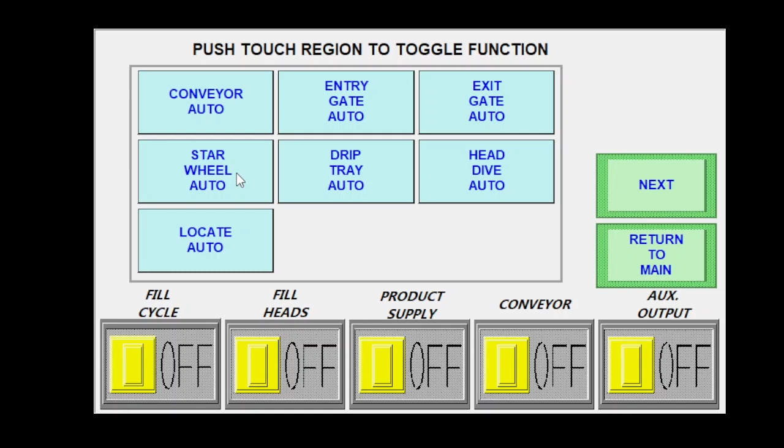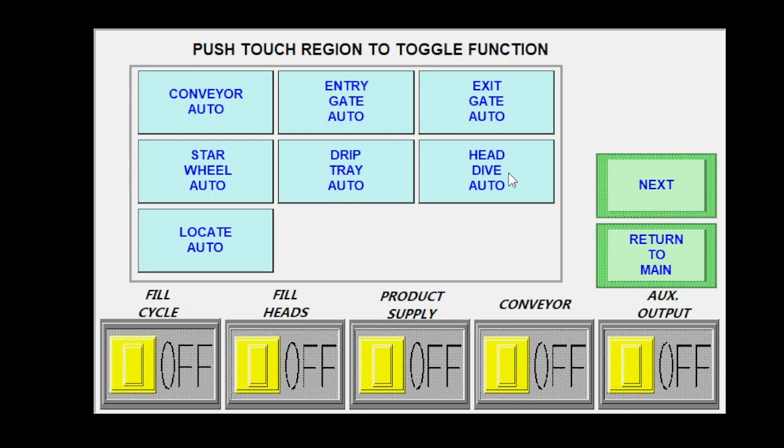Your entry gate auto and open and exit gate auto and open is just that. It'll toggle those gates if you're running pin indexing. Star wheel, if you're running a star wheel index system, this will open up your star wheel and allow you to freewheel it. The drip tray will operate your drip tray, if you have one. Head dive is going to dive down your heads to the lowest position and then bring them back up when you toggle it back off. The locate will be for your neck locators if you have them.

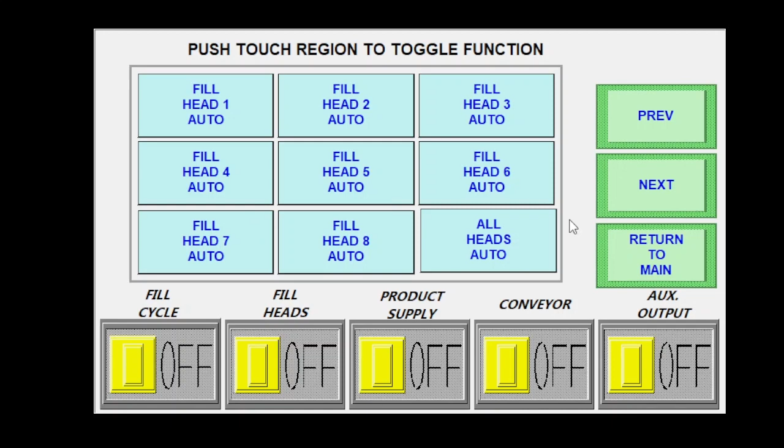Next over here, now you got all of your fill heads. This will cycle on your fill head and its matched pump. You can do them one at a time, or you can do all of them at once. Next over, you got the rest of them up to 12, and again, another all heads.

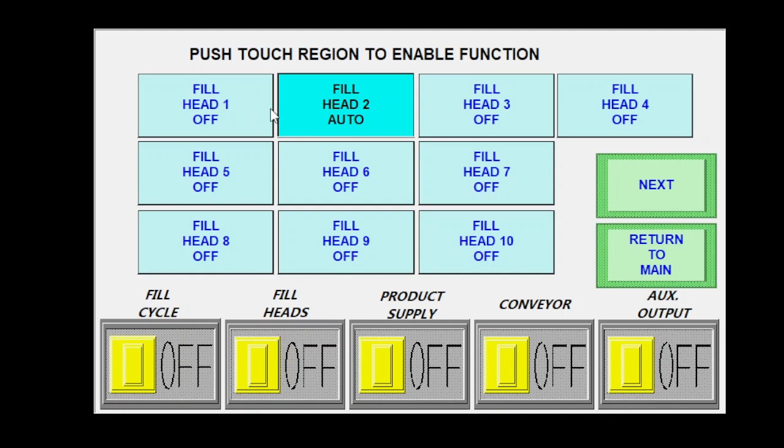If you return back to your main, next button down is going to be your filler setup. If you click on that, this is where you're going to select any options that you want to use during your fill cycle or with your filler in general. So if I wanted to just run heads 1 and 2, I can turn those on there, leave the rest of them off, and only those two would operate. If I next over, I got the option for my other two fill heads.

Next over again, now I can select if I want to run my neck locator if I have one, my drip tray. If you toggle these off, they'll just be in the retracted state, so they're out of your way. Head dive, you can select which options you want to run. You can either have it off so that heads will not dive at all. You can have standard where it's going to dive down to the lowest set point, fill, and then raise back up, or bottom up where it's going to dive all the way down to the lowest set point. It'll wait a predetermined amount of time, and then it'll raise back up while still filling.

Fill hold. If you have fill hold turned on here, this one is going to wait until your tank float is satisfied before it starts the fill cycle. If you have supply hold, it's going to wait until the fill cycle's over until this product supply turns on to replenish your tank.

Index type, this is where you select which type you have. So it'd be pin, star, none, and entry gate and exit gates. You can toggle inverted, normal. Generally, these are in an inverted state. So that way, when you hit the e-stop, the entry and exit pins pull back into the cylinder housings, so they're not stabbing anything.

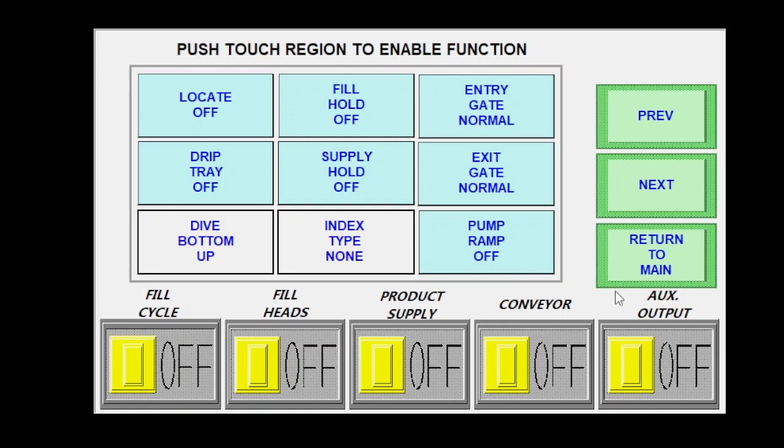The next button you got here is for pump ramp. This is an option that you can turn on, and then you can control whether you start with a slow fill and end with a slow fill, and then run full speed in the center, or if you just want to run slow in the beginning or run slow at the end. Once you turn this on, there's some other set points that we'll get to in the timer screen that allow you to control that.

Next, now you can change whether or not you're light on or dark on for any of your sensors, just in case you run a different sensor down the road. Some of them are not interchangeable, so we will give you an option to swap that out here. The backup float is the same thing, so this is just for the upper float in your tank. So if you have this in the wrong state, you're going to have an alert at a resting state on your main screen under your alarms.

Container available, you can turn that option off or on here. Dive limits, you can turn those off or on here. Generally, we do not run dive limits on our machines.

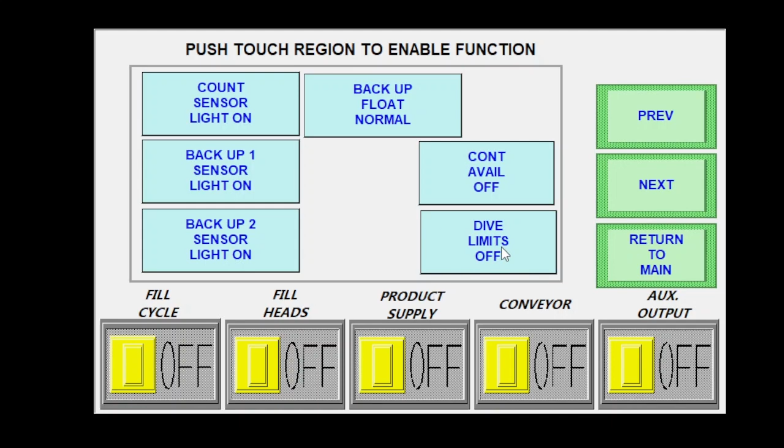If you next over again, now you have the option to run any of your fill heads in pulse mode, which is what our general machines are running, where you have a sensor that's reading a reluctor wheel mounted to your pump, or you can run in time mode. So this is nice if you have a bad sensor or a failure of some point. You can run in time mode instead of pulse mode. It's a little less accurate though.

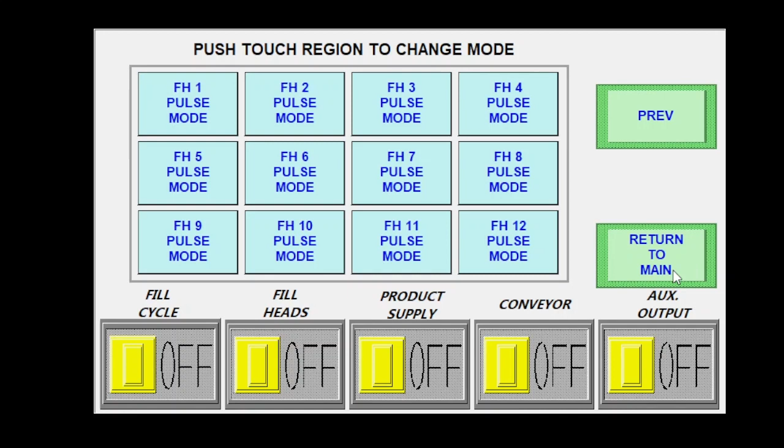If you return back to main here, next screen down is going to be our presets. If you come into this main screen, we'll start here where you can select your pump speeds. If you run here, you can set each individual pump speed however you want it. So if I say I want to hit 50%, that would run 50% of my pump speed. And then you can do that down the line.

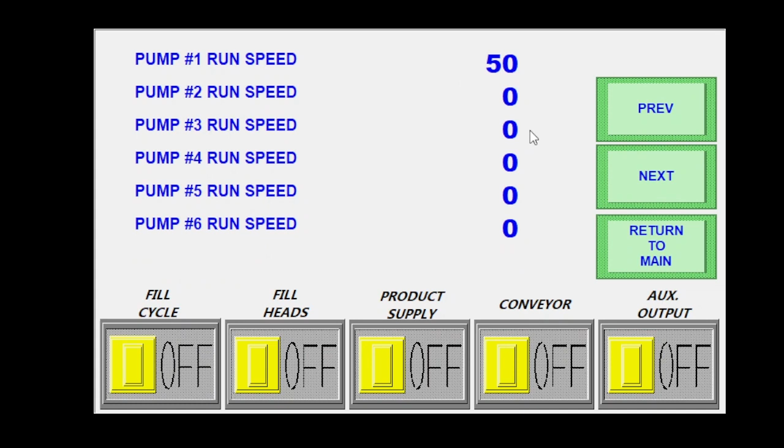And then on the next screen, I'm going to be able to set my low speed percentage. So this is going to come into play if you're running the ramp. So this would be the percentage of the ramp speed that we put in here. So this would be 10% of that 50% that I have set here. And you can toggle all of those independently.

If I return back to main, go back to my preset screen, run down container available on delay if you are running that feature. For this on delay, the line backup on delay, the no bottle, no fill delay timer, all of those are going to be the same situation where this time is going to be how long a container has to sit in front of the sensor before the PLC recognizes it. This helps get rid of flashing or anything like that where you sometimes get a weird reading on say a glass bottle. We generally run these at about a half of a second.

Exit gate duration. This is going to be set during your automatic setup, but you can fine tune it here. This would be the amount of time that the gate needs to stay open in order for the containers to be able to pass by, leaving the fill zone. And then it also uses this to know how long to keep the entry pin open for the new containers to come into the fill zone.

Your entry gate delay open timer, this will be what creates the gap between the old containers leaving the fill zone and the new containers coming in. So generally we'll set that at about 2 seconds. In-feed sensor, no bottle, no fill delay, we already talked about. In-feed container count preset. So this is where you'll set how many containers you want your in-feed count sensor to count coming in. This will generally match your number of fill heads.

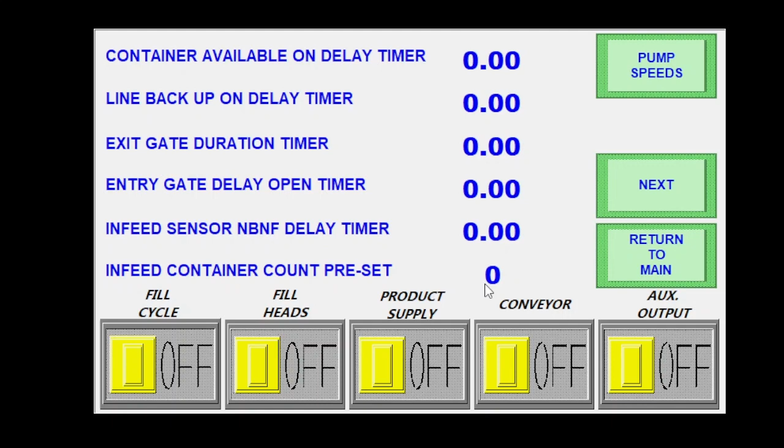Next over, if you're running a star wheel, this is where you would set the counter for that. This will be determined based on the design of your star wheel and how many pins there are per pocket. So you'll set this according to that.

Delay head dive timer. This would be once the containers are indexed into place, how long does the machine wait before it activates the fill heads to dive down? This is usually used to allow bottles to stabilize or to allow time for a drip tray to move out of the way or a locator to get into place. You can run a little bit of time here.

Head release up delay timer. This will be used only when you're running bottom up fill. So this would be the amount of time once your nozzle reaches the full down position, how long it waits before it starts to lift back up.

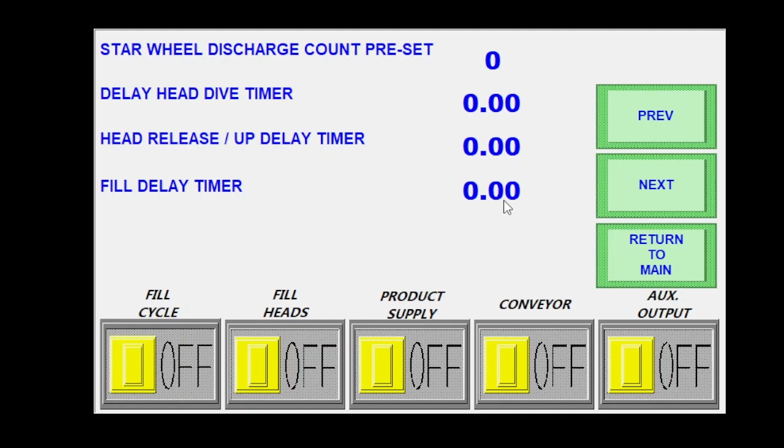Fill delay timer will be the amount of time after the fill heads are initiated to dive, how long does it wait before it sends the signal for them to actually open and start filling. So especially on a dive situation, sometimes if you're diving slow into a container, you'll want to put a little bit of time here to allow the fill head to be completely into place before your fill head opens. Or in a bottom up fill situation, you'll want to make sure that you're waiting until the nozzle is all the way at the bottom of the container before the nozzle opens up. So that's where you would adjust that.

The next screen, you're going to have new cycle restart delay. So this is going to time when your drip tray comes back out underneath your fill heads. And it'll also help you time the machine a little bit for slower equipment down the line.

So delay, exit, retract, in new cycle. This would be often used if you are running really long nozzles in a bottom up fill situation where you're pulling them out of the container and you have a lot of neck space after the fill level stops. So you'll put a little bit of time in here to eliminate the exit gate opening before the nozzle is completely out of the container. Sometimes that'll happen and it'll cause the necks of your containers to tilt back as they're trying to leave. So you can delay that a little bit here.

The buffer tank float delay timer. This is going to be the amount of time that your float has to be in the down position calling for product before the PLC actually turns on the product supply system. This will help eliminate sloshing in the tank from the product supply turning off and on too quickly. So usually about a second delay here is what we would run.

So the pump ramp delay time and the pump ramp duration time is going to be used if your ramp is turned on and you're running in a time-based mode, not pulse-based. So if you're in a time-based mode, you would adjust your ramp here.

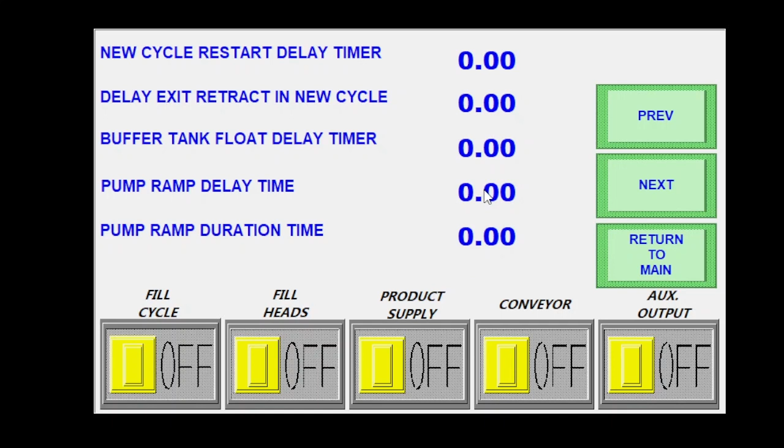Pump ramp duration time is just how long it runs in the fast speed. So if you wanted it to run at fast speed for 2 seconds, you would just put 2 seconds in here. And then you could position that 2 seconds within your fill cycle by adding or removing time here.

If I next over, I see where my pump ramp pulse settings are at. So if I'm running in the standard pulse-based mode, this is where I would adjust my ramp. So the pump ramp up pulse percentage, a higher number in this set point is going to be a longer slow speed at the beginning of the fill.

The ramp down pulse percentage is going to be a lower number from 100 to increase time of the slow speed at the end of the fill. You would always start at 100 and then lower this number. And the lower this number is, you're going to have a longer slow speed run at the end of the fill.

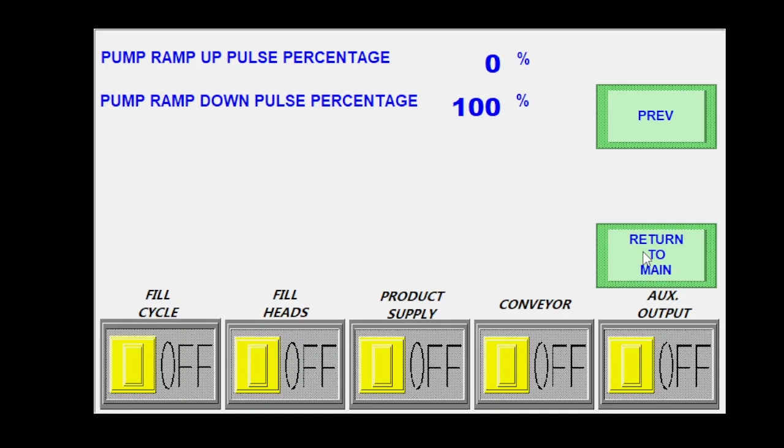I'd have all my mechanical settings correct, my entry pin, exit pin where I want it, my conveyor speed set where I want it. And I would move my containers up against my entry pin and have my in-feed count sensor set so it's reading on one of the containers. And I would clear this out so this is zeros and hit start ASU index, and that's going to open the entry pin, turn my conveyor on, move my containers towards my exit pin. It's going to count them, and then it's going to give me amount of time when it reads the set number of containers for my in-feed count.

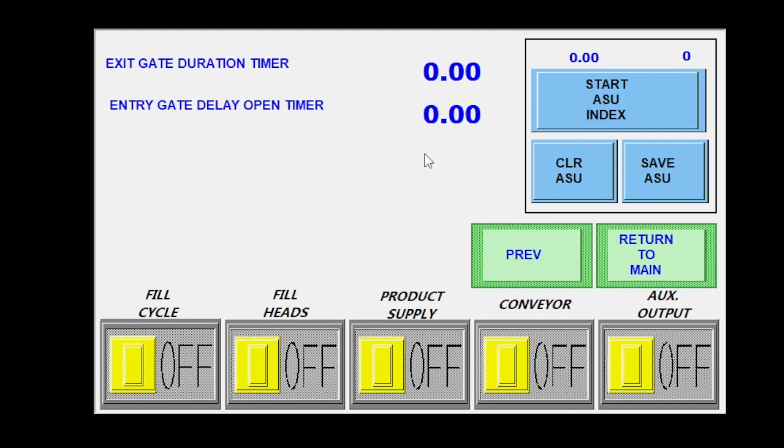That'll populate over here into my exit gate duration. The entry gate is standard 2 seconds. You can tailor that wherever you want it, and this will automatically populate back into your preset screen as well. From here, I should note that you can use your drip tray and your locate and your head dive all here when you're doing an ASU, so you don't have to make a mess.

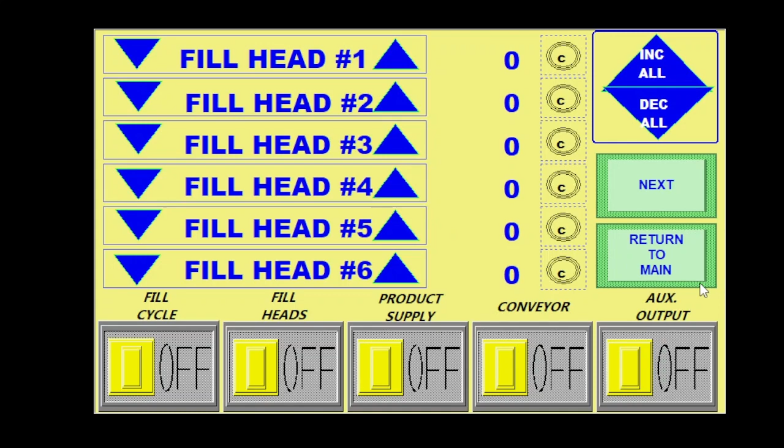If I return to main, my next screen over will be my recipe screen. This is where I can go to save up to 50 recipes. So I could click through and select any of the numbers that I want. I can hit save file for use later, or I can select the recipe that I want and I can load it for use now.